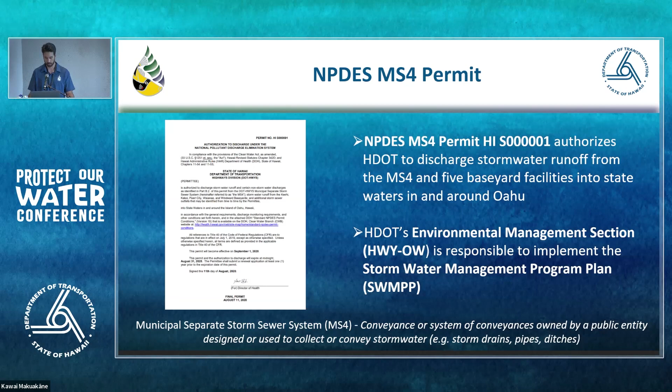So this is the stormwater management plan. There's a lot of different program elements, not just the construction program.

That's primarily why we are here today, because for the construction program, we have to provide an annual training for BMP and stormwater related activities. So today, those are the two we're going to go over. But just so you folks have an overview of it all, this is everything that Rodney and his group manage.

So this is the breakdown of the construction program and the permit for the MS4 permit. The permittee shall implement a construction site management program to reduce to the maximum extent practicable the discharge of pollutants from both private and public construction projects.

Not sure if everyone knows, but primarily a lot of the guys here are on the public side of this. That means anything funded by DOT generally is what public projects or contract projects means. And then we have encroachment or private projects. So that's, say someone wants to do a new driveway, it's encroaching within the right of way. They'll have to go to the permits office to get a permit. So that's kind of the difference between the two.

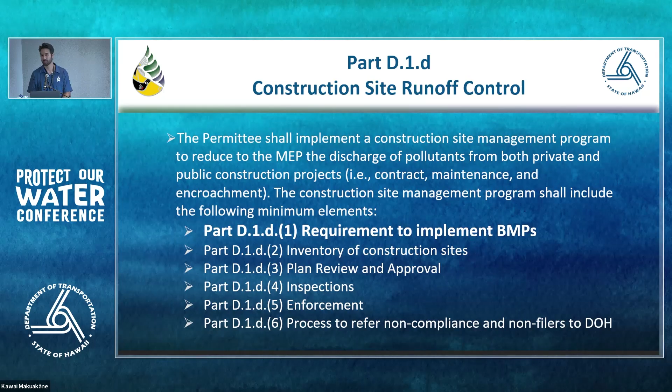So this is the first part of the permit. So the requirement is to implement BMPs and standards in accordance to the policies and the list of resources there.

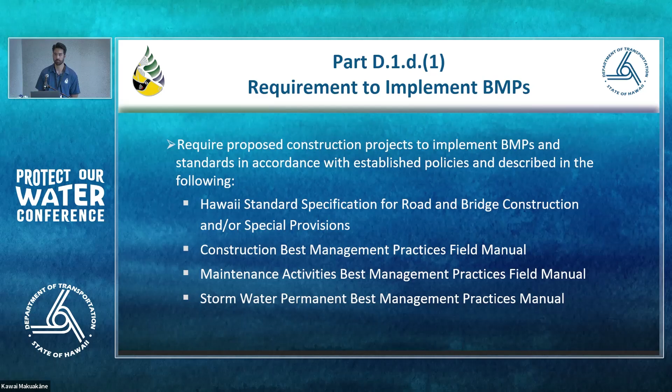So we have the standard specs that I'm sure many, if not all of you, are aware of. That's the DOT standard specifications for road and bridge constructions, the brown book. Probably all have digital copies at this point, and then we have our construction BMP field manual, maintenance activities, and post-construction BMPs.

For us, these are the main sections of the standard specs that are important for the construction program. The main one is the first one highlighted, 209. That was recently updated in January of 2022. And that's pretty much the rules of all public projects, private projects. So anything to do with construction, site runoff, that's the one to look at.

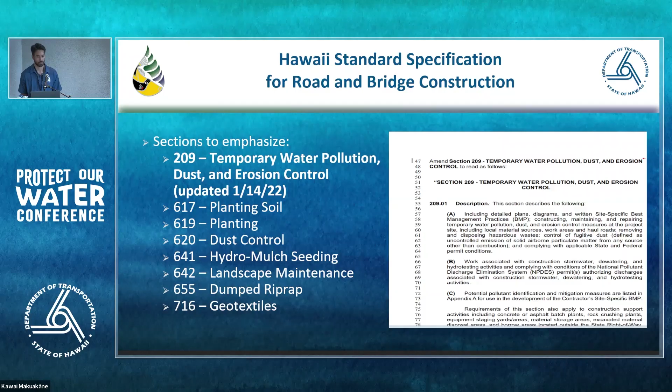stormwaterhawaii.com not only has our construction program stuff, but all program elements on there. And then we also have a BMP training website, which is specifically to the construction program. That one has all the resources you need for permit regs, manuals, handouts to assist you with like tips for staging areas and that kind of stuff.

And then there's a wiki site for HDOT personnel on construction projects. That one they recently updated, I think within the last few months. So if you are on a project, you can reach out to the e-construction staff and they can get you registered and set up.

Okay, so next part, inventory of construction sites. So another thing we do is we have to manage both the private and public side of things.

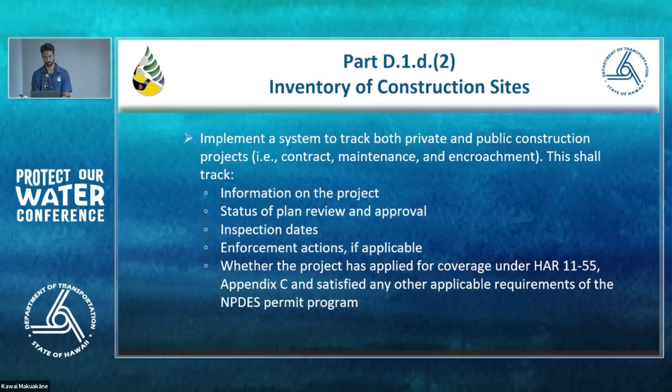And then any enforcement, so any LDs that are assessed or any complaints, we keep that also in Maximo, as well as if the project has an issued general permit for construction discharge. That's Appendix C. I'll go over a little bit more of that later. That's how it's defined in the SWMPP, the Stormwater Management Plan.

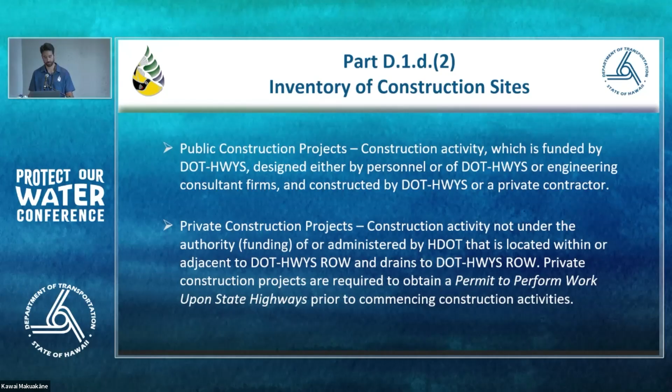So we have public and private. Public, the main thing is it's funded by them, they're responsible. Private is the other side of things, so they are not funded or responsible for anything in regards to the project itself. Those projects need to obtain a permit to perform work. That's what that looks like right there on the left side.

And you also have to submit a BMP plan application to the permits office if you're going to be doing any work within the right of way for your personal use.

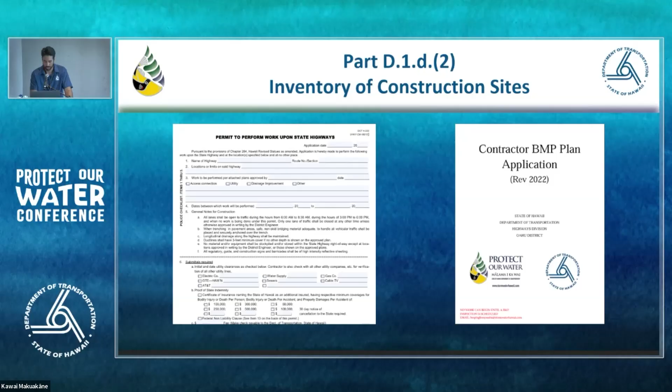Okay, third one is plan review, so that's SWIPs and the checklists. Just to quickly go through the permit language: prior to the commencement of construction, they need to have a reviewed SWIP from DOT.

If we go further into that, any public project needs to have an approved SWIP from HDOT prior to any ground disturbing activity. And that doesn't count the ground disturbance of installing the BMPs themselves.

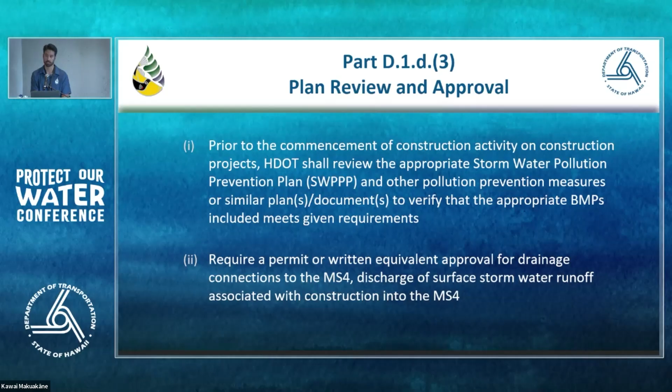Number two is requiring a permit or written approval for drainage connections to the MS4, discharges into the MS4. That's the permit I just showed you, permit to perform work. We also have a discharge and connection permit, or DOT, sorry.

Do not allow construction to commence on any private or public construction project unless and until it has verified that the project has received approval from DOH an NGPC. The NGPC Appendix C is generally what we see on the projects, for construction discharge. We always want to make sure that any project disturbing over an acre will trigger that permit. And then lastly, to have a checklist to review your SWPPPs and your plans.

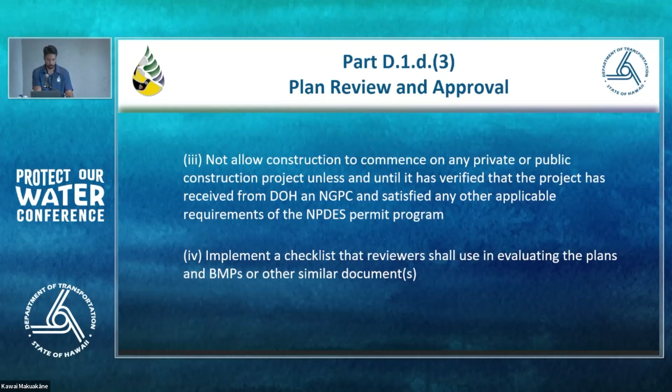It gets pretty long, like 200 pages at the end of it. Not sure how much people really read it, but they're developed and approved. And then we have our SSBMP plan, which is for anything not disturbing over an acre and doesn't trigger the Appendix C.

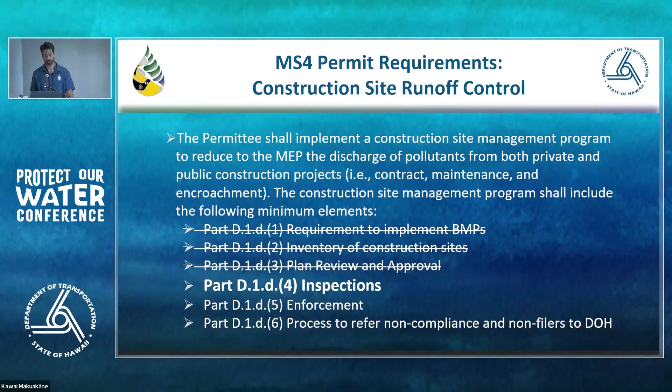Okay, inspections. This is kind of what everyone's here for, probably. So like I said, any site needs to have a third-party inspector. For public, we have Angie Makadangdang. She is from Bowers and Kubota.

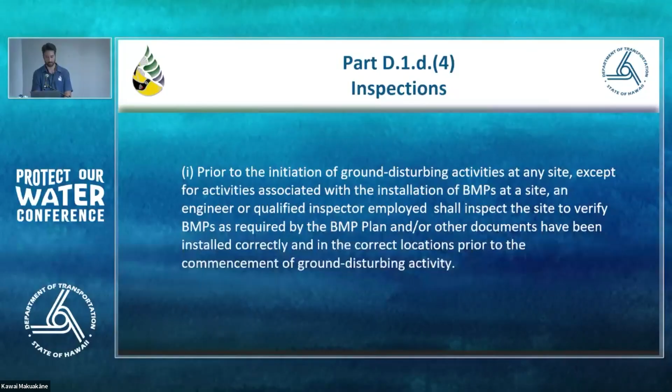She's probably listening in. Unfortunately, she wasn't able to attend because UH is playing in Las Vegas and they're doing good, so she wanted to make sure she could go watch. I get it, I get it. And then, like I said, these guys over here are for the private side.

Okay, so in addition to inspections required by the NPDES permit, all contract and maintenance construction projects shall be inspected at least monthly. So that's Angie. And then all construction projects with a permit to perform work, a connection permit or discharge permit shall be inspected at least once annually or once during the life of the project.

A lot of times these private projects are things like new gas line, sewer, new driveway. These things only last a month or two, if that, so a lot of times we're just inspecting once throughout the year, which is why it's really important for the contractor to email us to let us know they're starting, so we can do that inspection before they finish up.

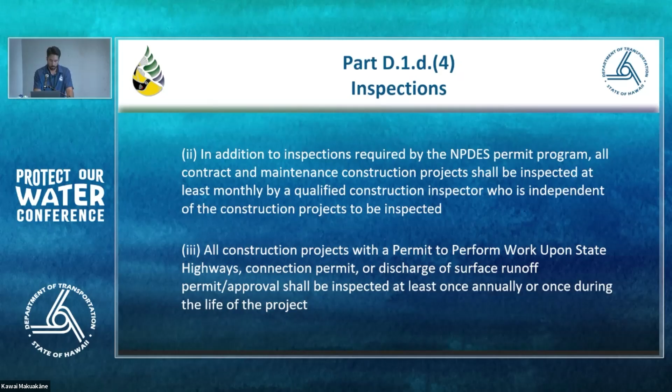Okay, so these are the requirements for the third party on the public projects. They must be inspected once a month by an inspector or engineer who's not on the day-to-day operations. For those of you who conduct the weekly inspections, that's a totally different thing, required by the Appendix C permit. These inspections that Angie does, the third-party inspector, are primarily for this program here.

And there are ways to reduce your frequency of inspections. So that's the way to do it: you got 3 successive months of 0 critical or major deficiencies, or less than 6 minor deficiencies and no more than 3 in one inspection. If you get all those, you can move to quarterly.

Most people have a hard time getting to that, but yeah, we always put our best foot forward and try to get there.

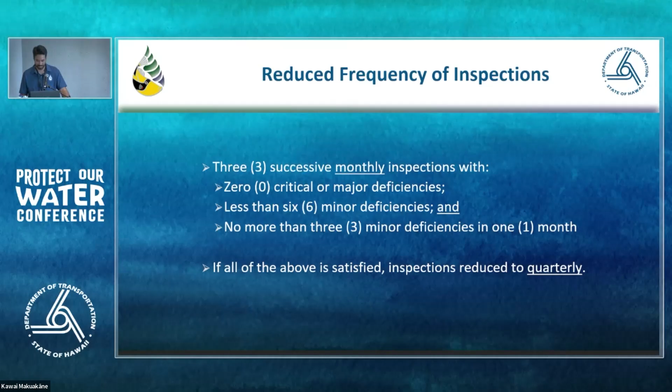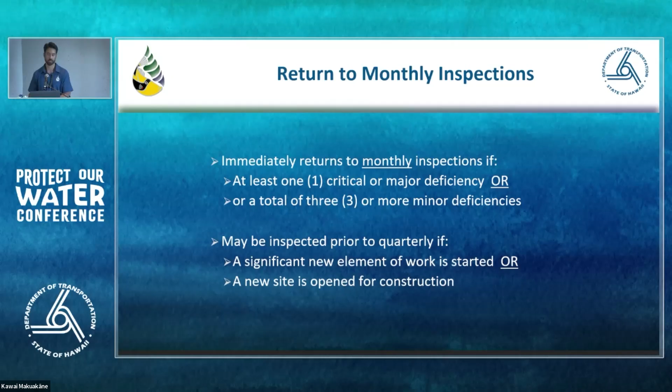And this is what happens if you get to quarterly and then don't do too hot in the next month. So say you move to quarterly, your next month inspection, you had a critical or major deficiency, or three or more minor deficiencies identified by the third-party inspector, then we move back to monthly. There are also some exceptions: if a significant new element of work starts, or they open up a new phase of the project, then we just start on the monthly again for that area.

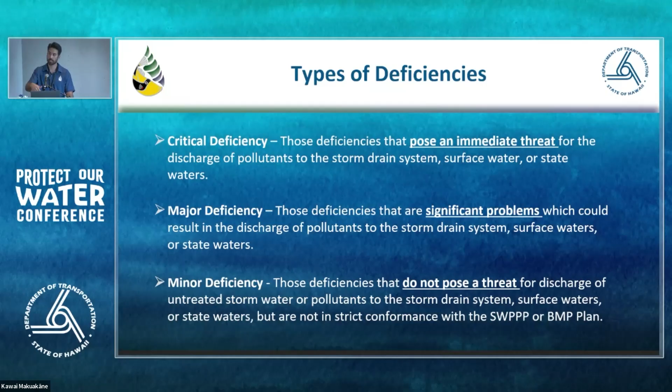I'll go to the minor one first. The minor one is like those bio socks, or people call them sausages - if they got holes in them or something, that's a minor. And then a major could be, usually has to do with hazardous waste management - they may not have secondary containment, things may not be properly implemented as it shows on their plans, stuff like that.

And then for the minor and major deficiencies, it's 5 calendar days to correct any deficiencies. Usually the process for that is Angie will send you her report with her photo log, any photo that calls out deficiencies. You want to send her a photo of the correction as well as the description of what you did to correct it.

Okay, oh yeah, there's one other thing I wanted to point out. Sometimes on projects, they'll do their weekly inspections required by the Appendix C permit at the same time as a monthly with Angie. If you do that, you have to abide by the more stringent time frame.

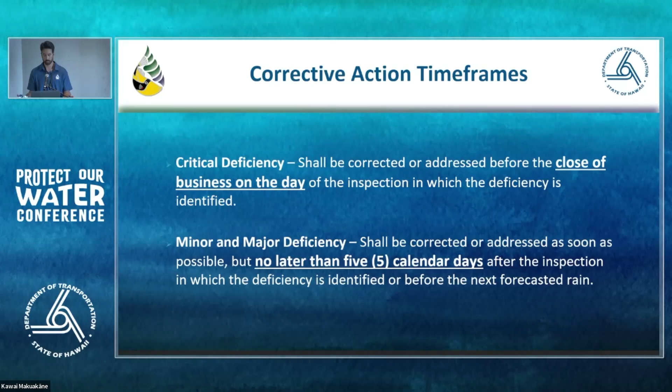So on your weekly inspections, they're much more stringent - like minor repairs, you have to correct that day, at the end of the day. Any major thing, like you got to bring in new erosion and sediment controls and reinstall, that's 7 days. So it's much different than this corrective action for third parties. Just be aware if you do have those inspections on the same day.

Okay, so these are just general things to point out - things that we see throughout the year. Just wanted to highlight since we have everyone in front of us. Some just real general basic rules.

Whatever's on site needs to be reflected on the plan. The plan needs to be approved first before you have anything on site. So if you're going to open up a new staging area, we're going to want to amend the plan, get it approved by DOT prior to actually implementing it on site. I know sometimes things happen, construction is very fluid, so you just work with the DOT engineer and make sure they're on board and aware of everything, all the changes happening on site.

BMP installation phasing, that's another big recommendation. A lot of these DOT construction projects are linear, stretching miles and miles.

Phasing, so chop it up. It helps everyone because you only have to install your BMPs and be responsible for that specific section. Then you can close it up and move on to the next.

It's a little cleaner. I'm not going to name the project, but we have a really big DOT project right now, and the phasing was a little off. It's a 5-mile project, and we had to walk the whole thing. Took us about 4 hours. I was complaining quite a bit, and it was hot too.

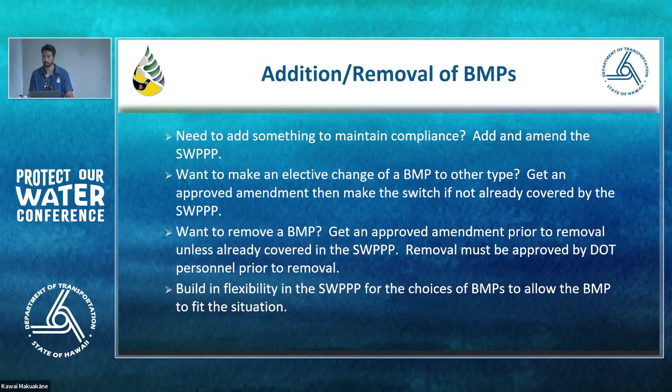Oh, I didn't put that. Okay, anyway, so this is the last one.

Enforcement. So DOT has an ERP, called the Enforcement Response Plan, and that dictates what happens if you're not in compliance. So that's all the rules.

There's a table 2-1 in there. That's what dictates your corrective action timeframes that I was talking about, like minors - you've got to correct the day of, that thing for your weeklies. That's in there, as well as the stages of enforcement.

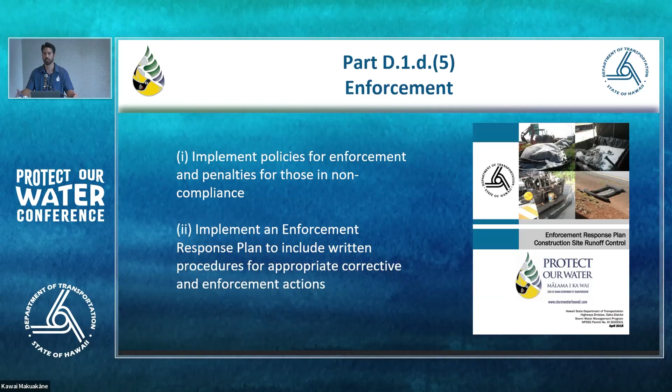So basically, the first one is verbal notification - you're out of compliance, please correct, blah blah blah. If that doesn't work, it escalates to the next step: DOT sends out a letter saying you're out of compliance, please correct this by this time. If that doesn't go well, it just keeps going up until we get to fines, and we may have to get DOH involved and that sort of thing. So that's in there.